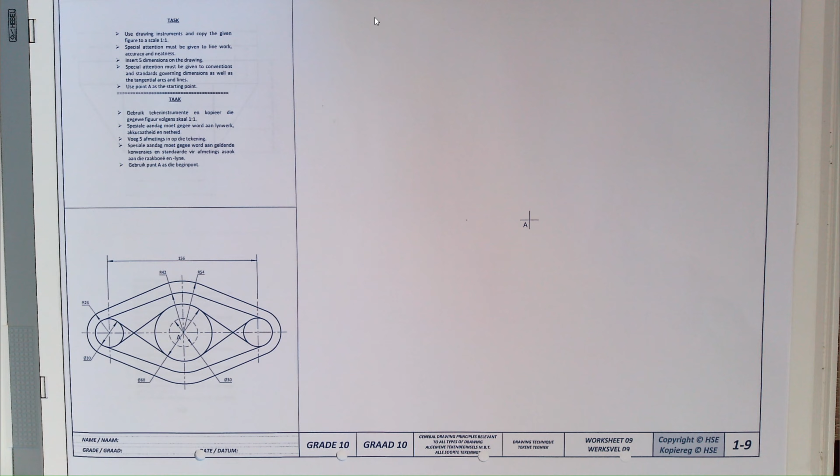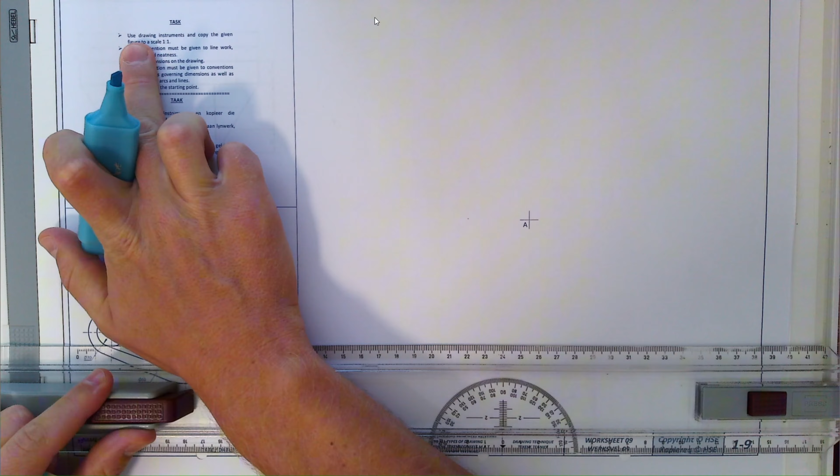In this lesson, we will look at the general drawing principles, and I will do the drawing on page 1-9 in the HSE drawing workbook. So let's get started. First, we're going to start by reading the question, and I'm going to take a highlighter and highlight everything that I find is important. The question is as follows. Use drawing instruments and copy the given figure, this is the given figure, to a scale of 1 to 1.

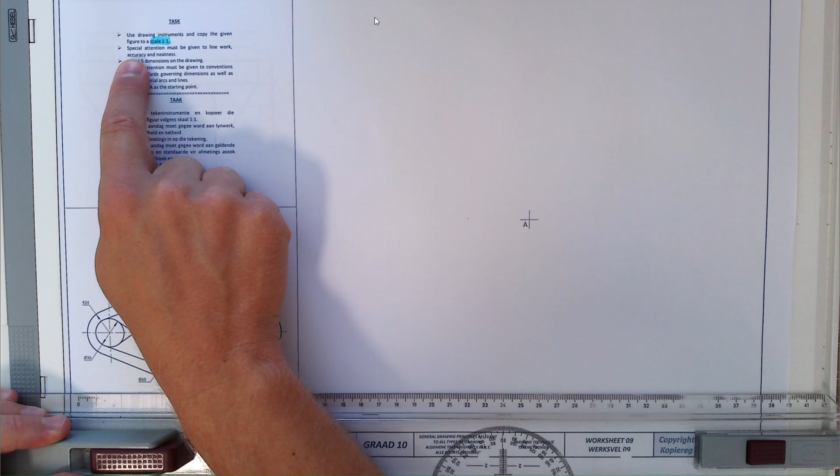What does scale 1 to 1 mean? It means we are going to take the dimensions as given here and apply it to the drawing space. There's no calculations that we need to do on conversion with our calculator. So I'm going to use the dimensions as it is given here and apply it onto the drawing space. Special attention must be given to line work, accuracy and neatness. Insert 5 dimensions on the drawing as well, and then special attention must be given to conventions, dimensions as well as tangential arcs and lines.

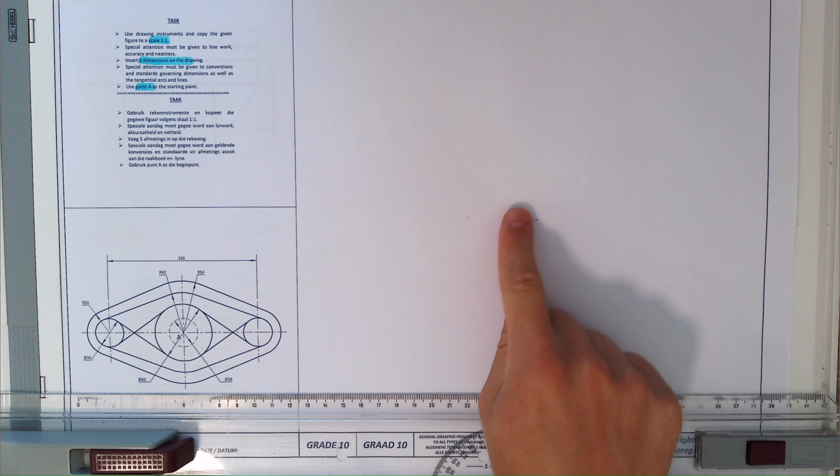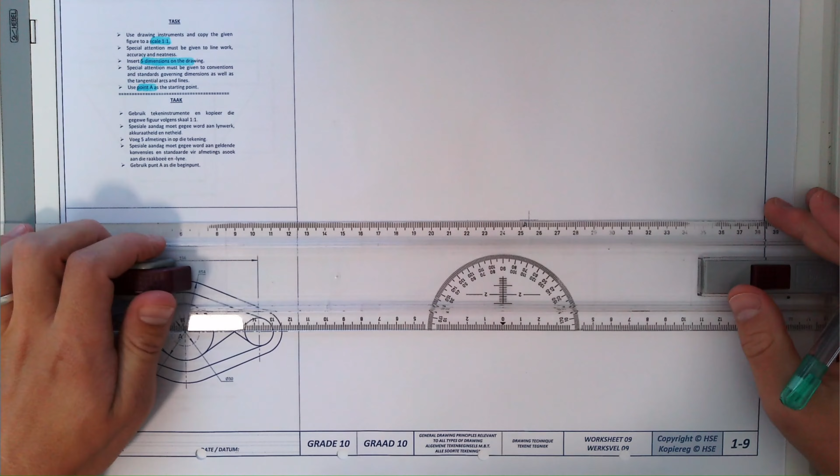Use point A as the starting point. If you look here, you can see that you have a starting point A given, and you can locate it in the middle of the circle. So first things first, I'm going to start by constructing all the center lines. Through point A, there's a vertical and a horizontal center line. So I'm going to add that in quickly. A center line is long, short, long, short, long, short.

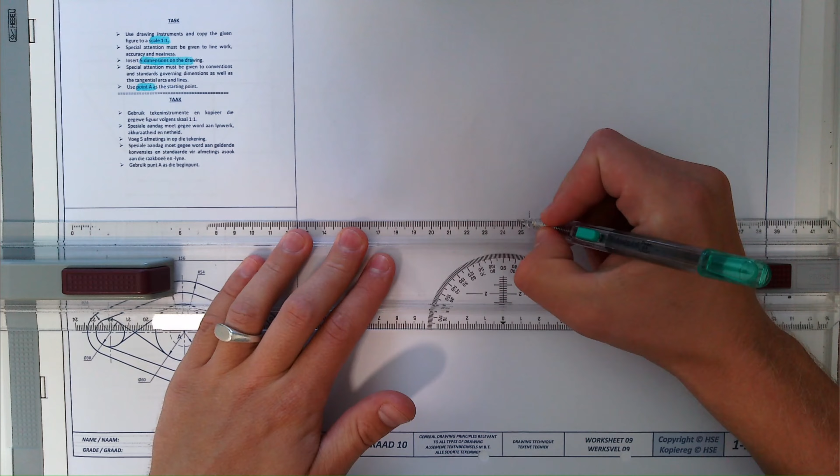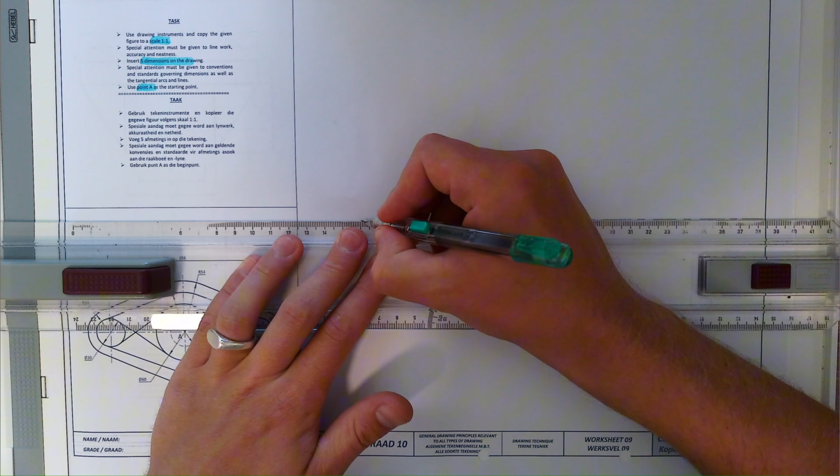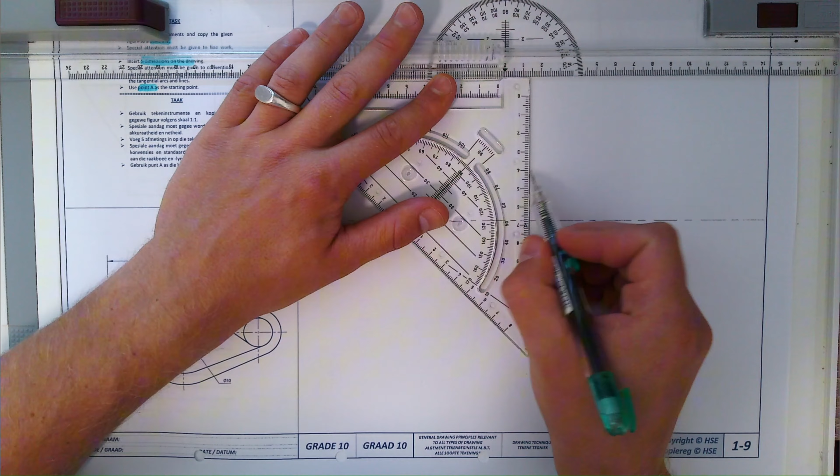I will take it to the edge of the page as well as to the left side. Short, long, short. It's like chain line. This is also a B-type line, so it's not too light and it's not too dark. Happy with that? Then I'm going to add the vertical one. I make sure that the triangle is flush against the T-square. So it's short, long, short, long. Okay, this shouldn't take you too long. Don't overthink this, just put in your center lines.

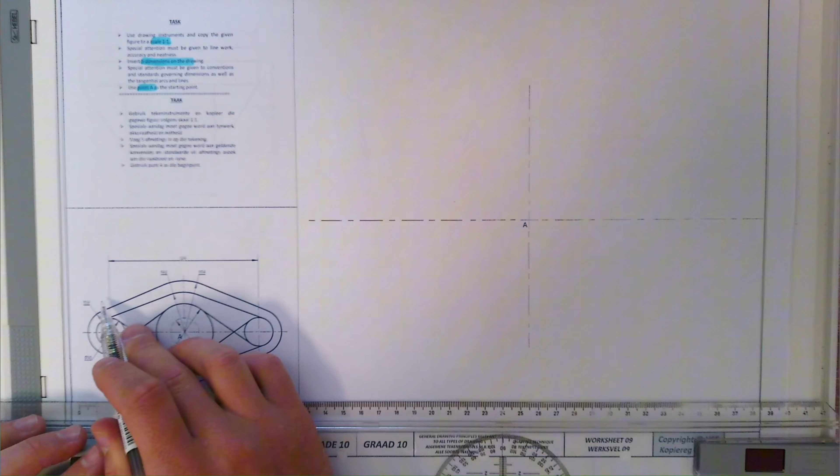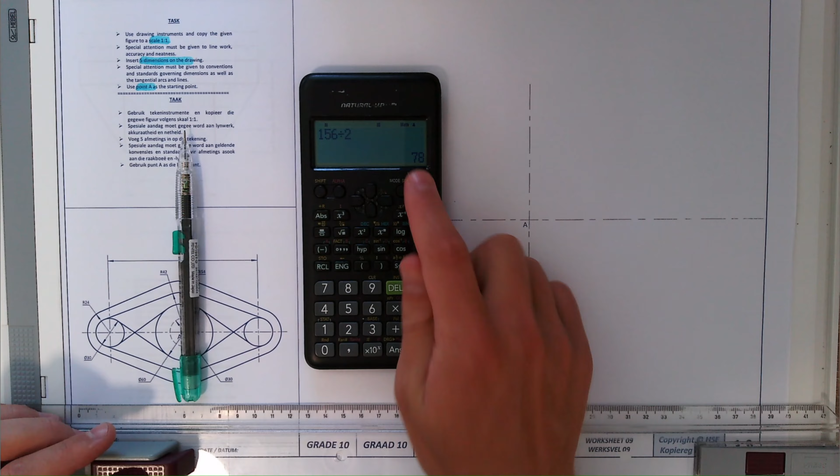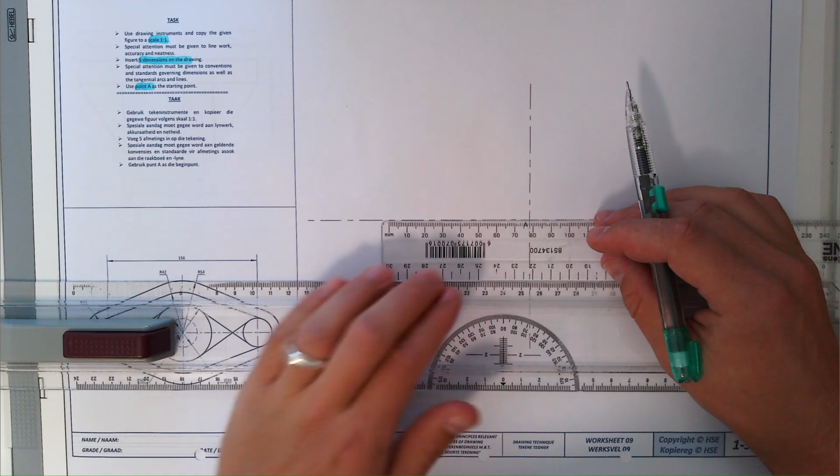Now, there are 2 additional center lines, one over here and one over here, and they are 156 millimeters apart. We have the middle point, so if we divide 156 by 2, we get 78. So from point A to that center line is 78 millimeters, and from point A to that center line is 78 millimeters. So I'm going to use a ruler. I put my ruler flush against my T-square, and I'm going to mark off 78. Just going to make a mark, and 78 to this side.

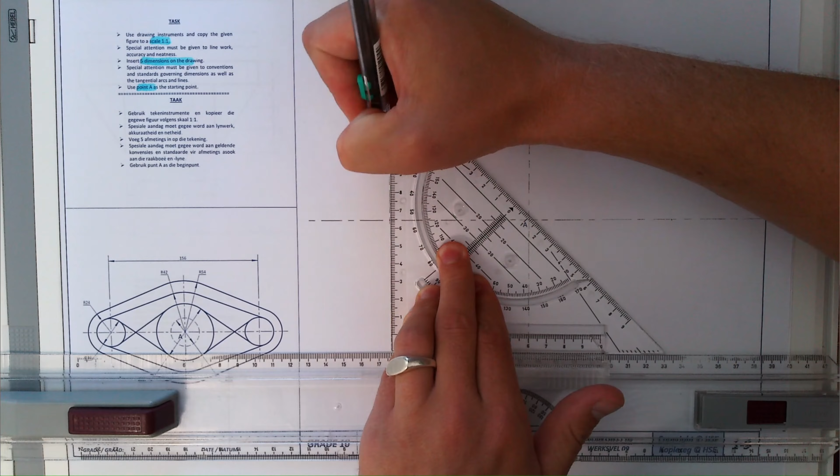There I will draw the vertical center lines. So short, long, short, long. That would be enough. And I'm going to do the same on this side. Short, long, short, long.

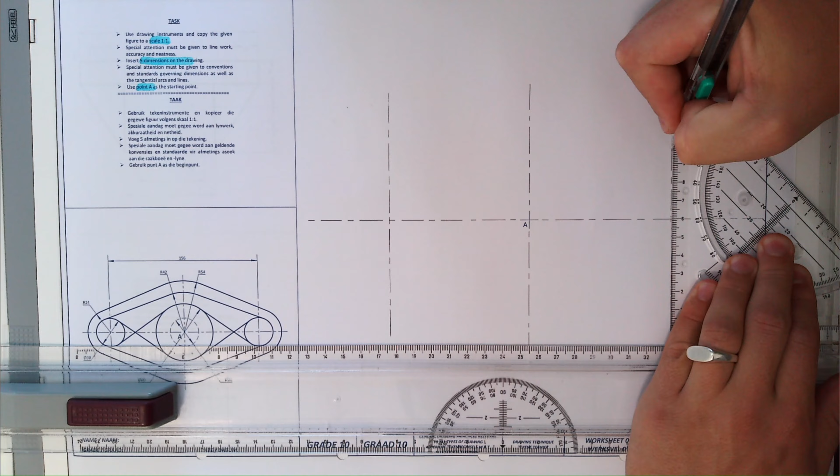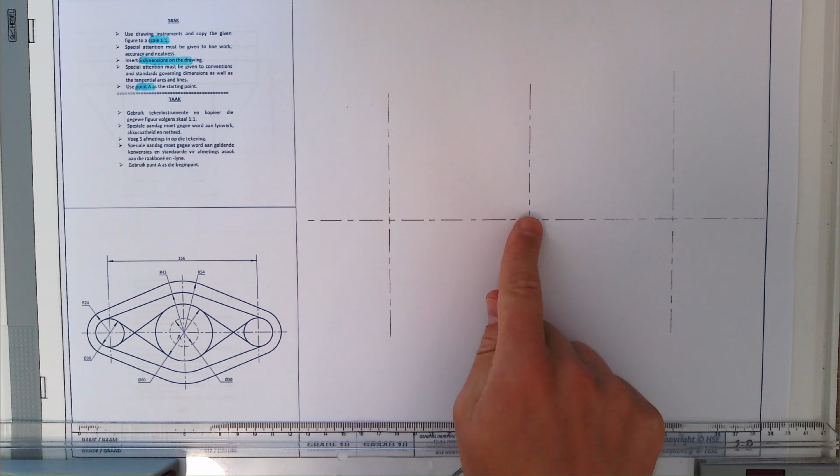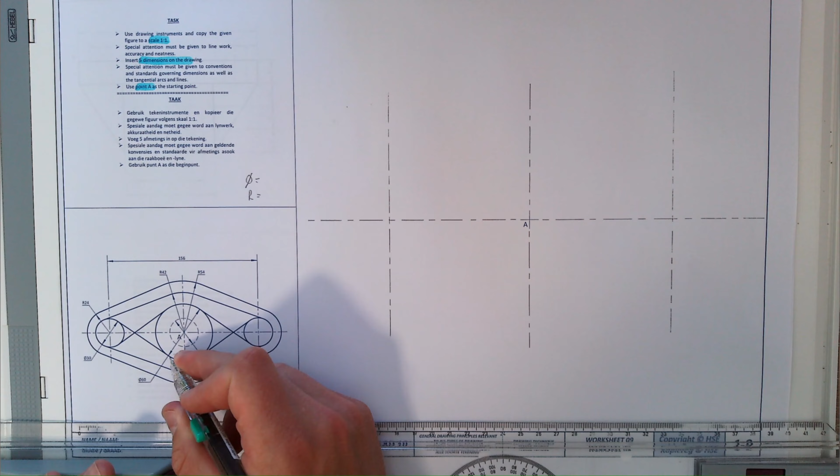Now, we are going to use our compass quite a lot today. I'm going to start in the middle at point A. I'm going to draw that big circle, which has a diameter of 60. Now remember, if they give you a symbol that looks like this, that means diameter, and if they give you an R, that means a radius. When they give you a diameter, it is from edge to edge, 60. So we need to get the radius. Half of 60 is going to be 30. So I'm going to take my compass and set this on 30 millimeters.

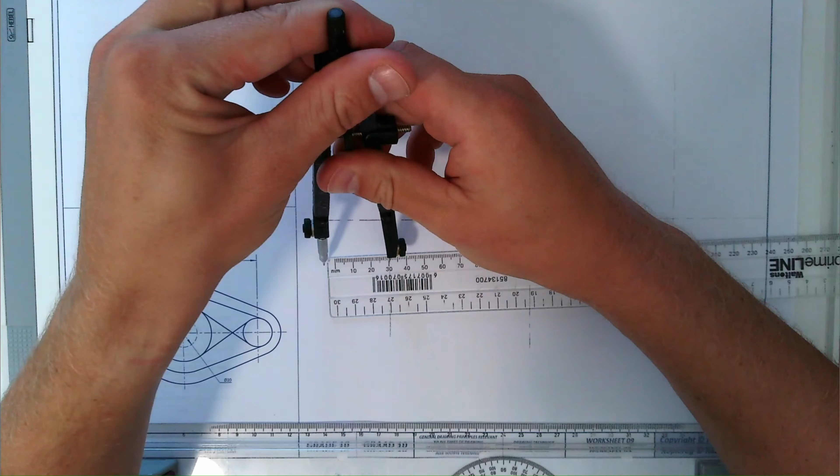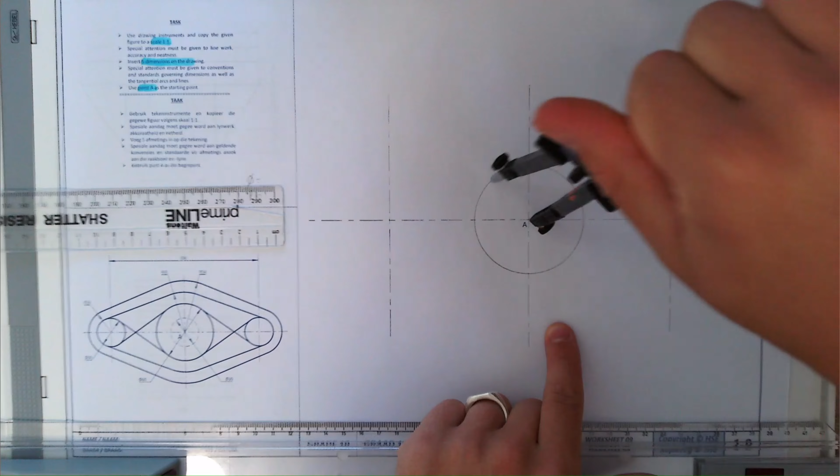Make sure to work accurately. So make sure you have your 30. I've got my 30 there. Put the sharp point in the middle at point A. Press down into the page on the drawing board. And this circle you can draw as a hard circle with a solid line. Great stuff.

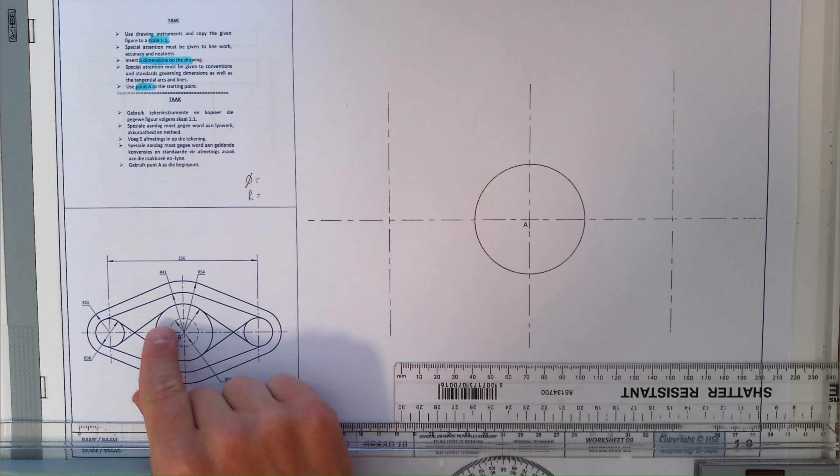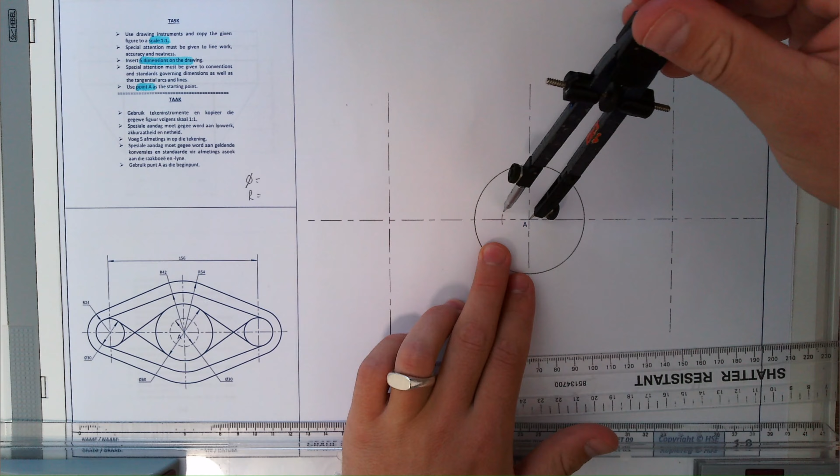Yes, that was 30. Then, on the inside, you will see that there is a dotted circle, and that measurement is diameter 30. So diameter 30 is going to be radius 15. So I'll put my compass on 15. That's a dotted line, so we're going to draw a dotted line. So it's short, short, short, all the way around. The dotted circle.

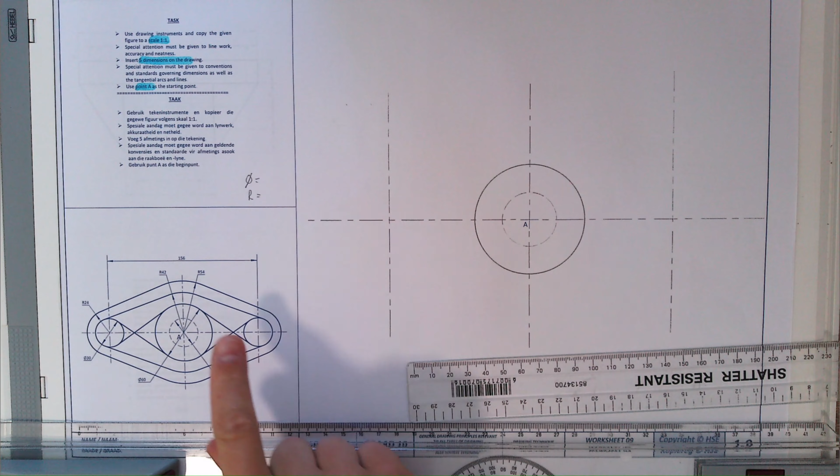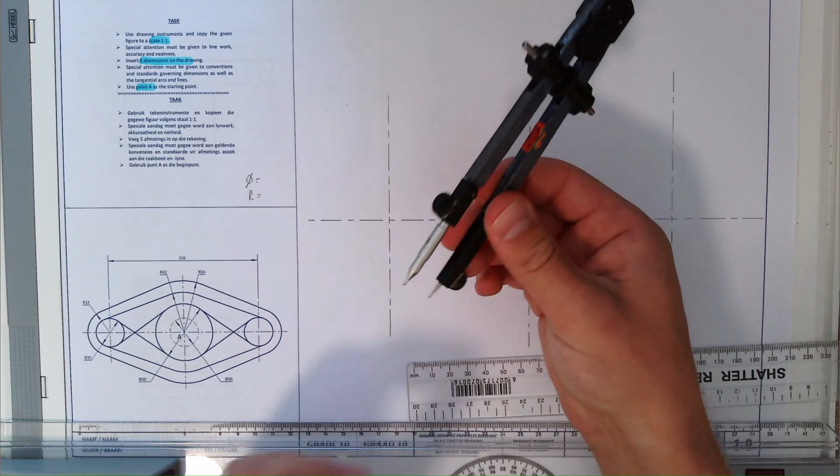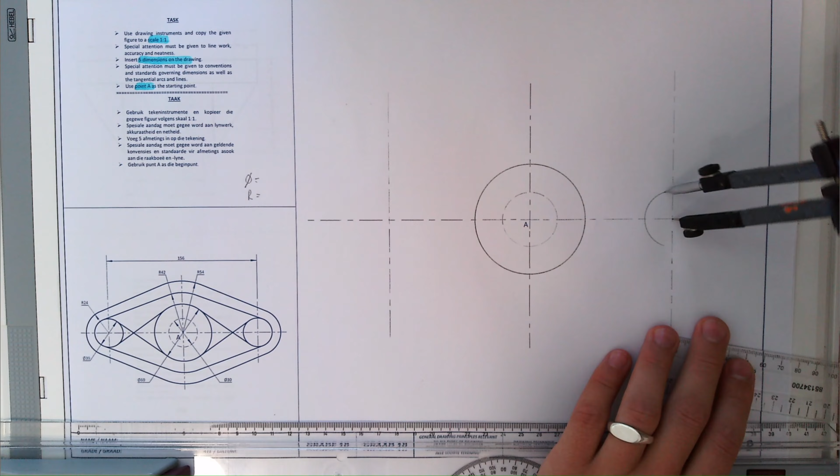Then I'm going to construct that little circle over there and that little circle over there. Both of them have a diameter of 30. So it's the same measurement that I've just used to construct this dotted circle. So we're going to keep this on 15. Just double checking before I draw. I've got my 15 radius. Why radius? Because it's given as a diameter 30. And then I can draw that circle as a solid circle. Nice and dark. As well as on this side.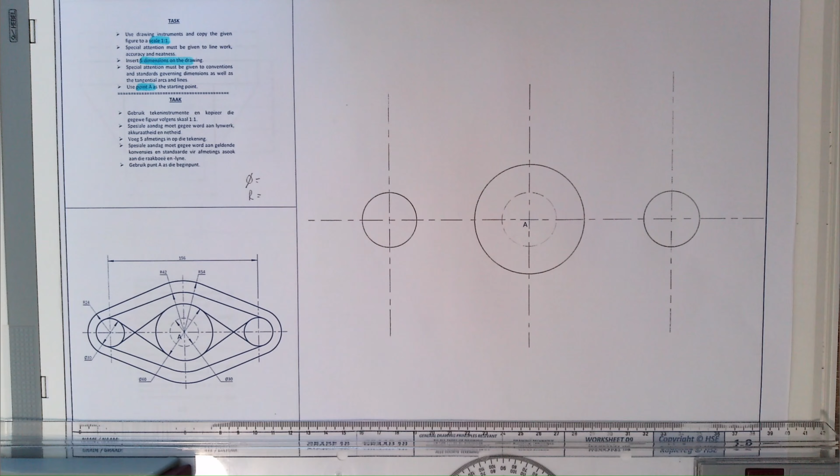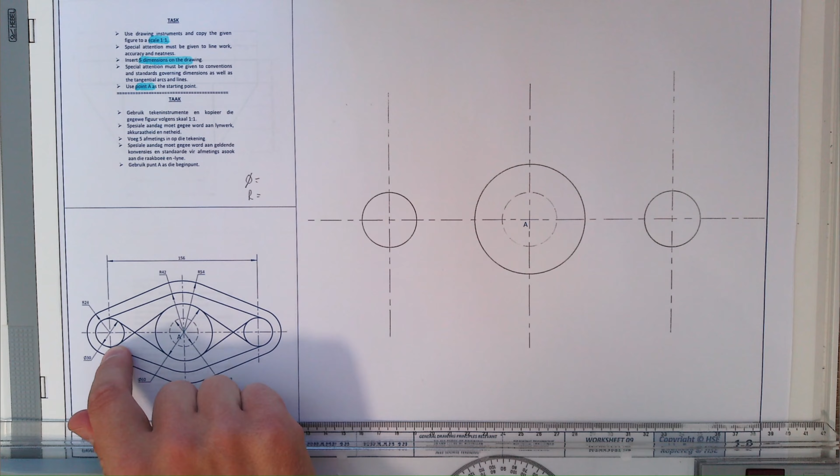Now, we need to be careful with the following lines. If you look carefully, you will see these lines are tangent lines. So from this arc of the circle to that arc of the circle, we need to draw a line which connects the two arcs. Now, a tangent line, you could think of this like a bullet being fired from there, and it needs to skim or just touch the arc of the circle. So you're going to do this with a ruler, and play until you get to a specific point where you make contact with both arcs. So I'm happy with that.

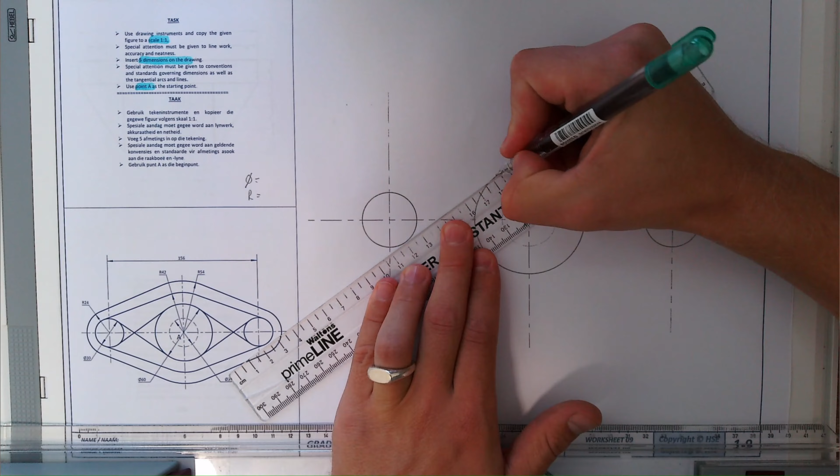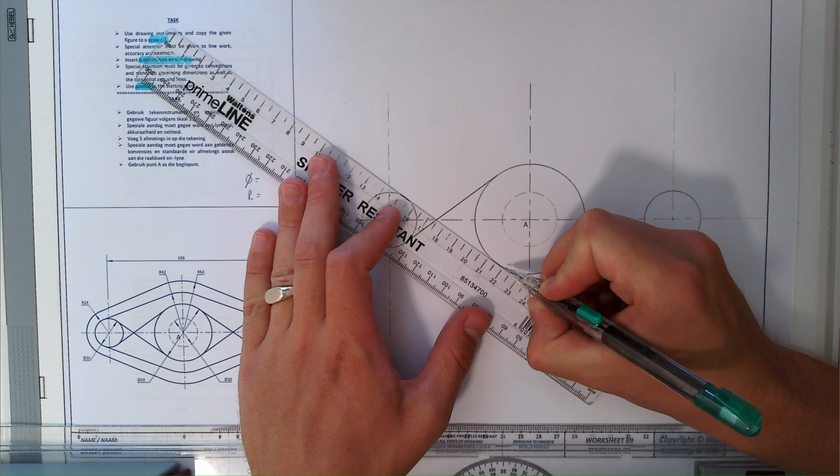The line should not go through the circle like over here. It just has to touch the arc of the circle. It's very important that you pay special attention to those tangent lines. Okay, good stuff. There's one running on this end as well, so I'm going to put that in. Double check before you draw if you are happy. I'm happy with that. And connect.

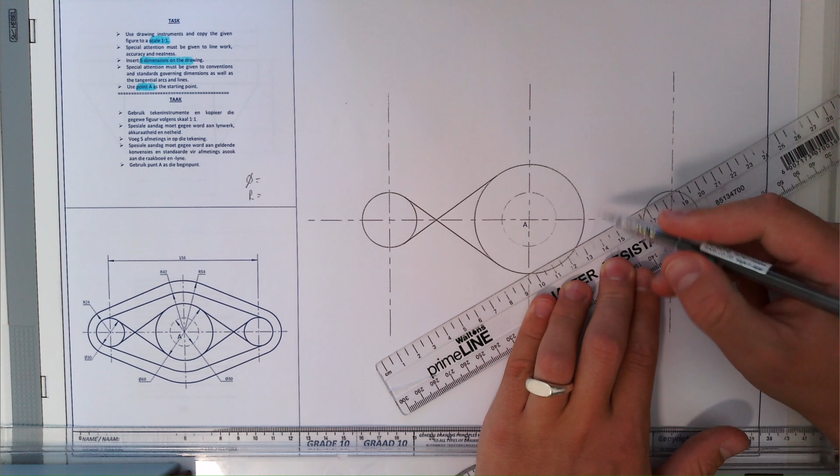So if I continued this line, it would go through the circle, and the same over there. So it's not from center to center, like that. You can see that that line will go through the circle. It's a tangent line. There we go. And one here as well.

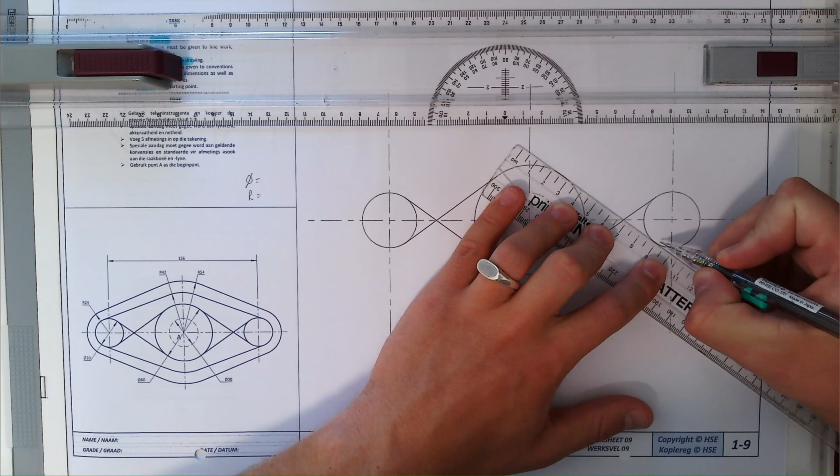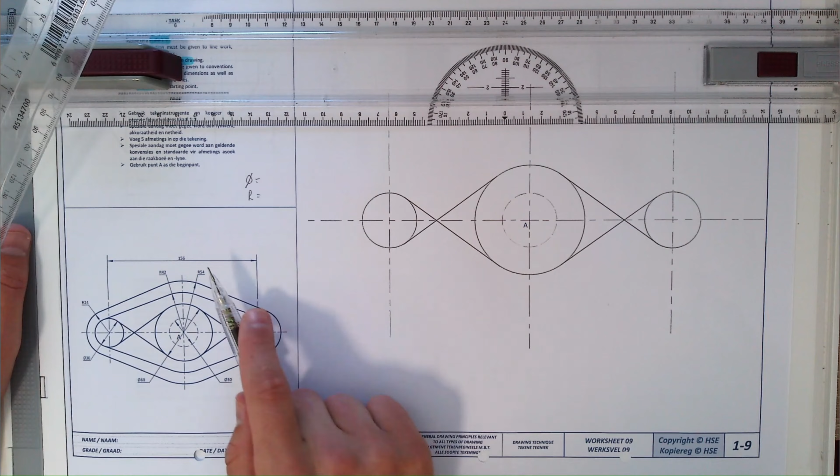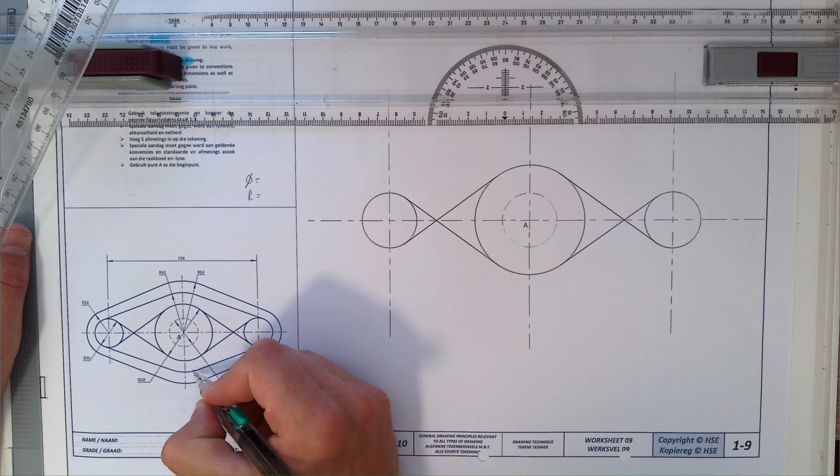There we go. Next up, we have an arc here, an arc there, an arc there, and an arc here, and an arc here. If we want to get this arc, it is radius 54. And that arc is radius 42. From the center point, you can see that the dimension is given from A to there. And that will also be 54. And that will also be 42. So 54 and 42. We are going to construct these circles light first.

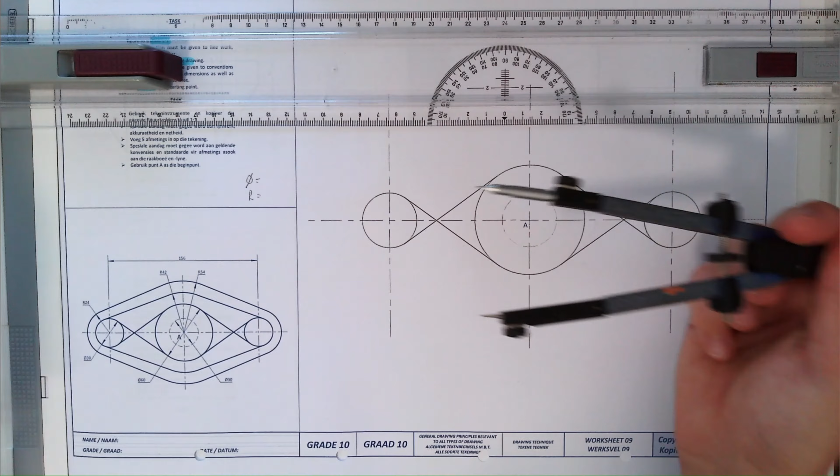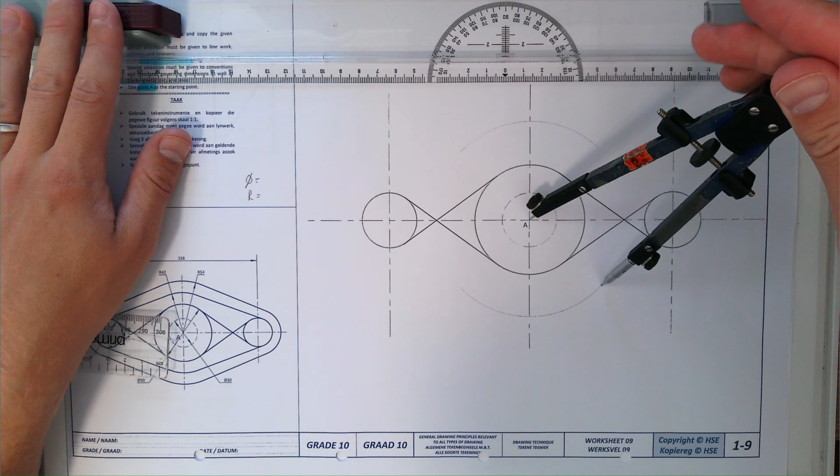So I'm going to set my compass on 54. That's 54 millimeters. Take the sharp point, put it in the middle at A, and go draw a light circle or arc at the top as well as the bottom. Okay, we're going to do this light first because it's only a little part of that arc that is going to be solid. The next one in here is a radius 42 and a radius 42.

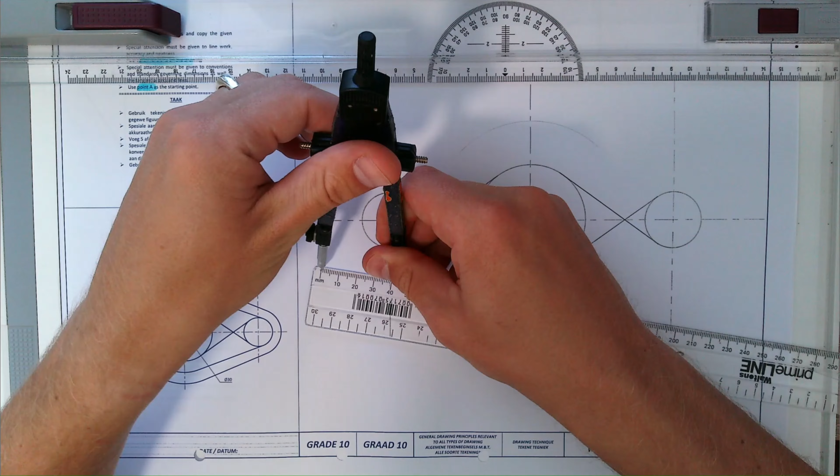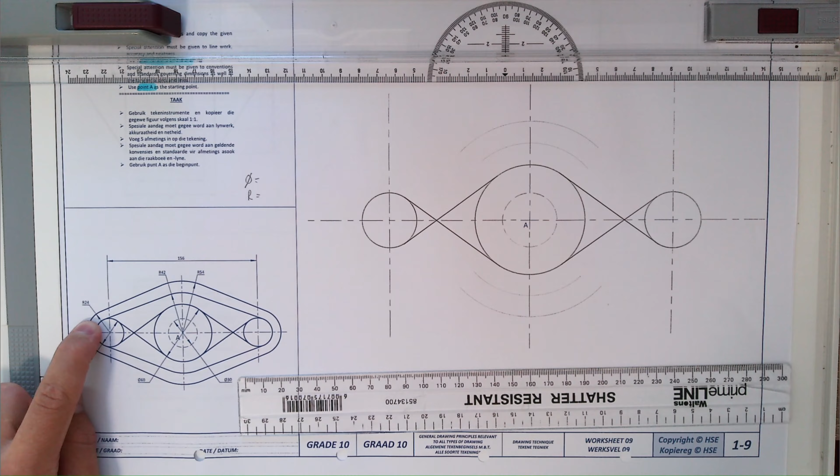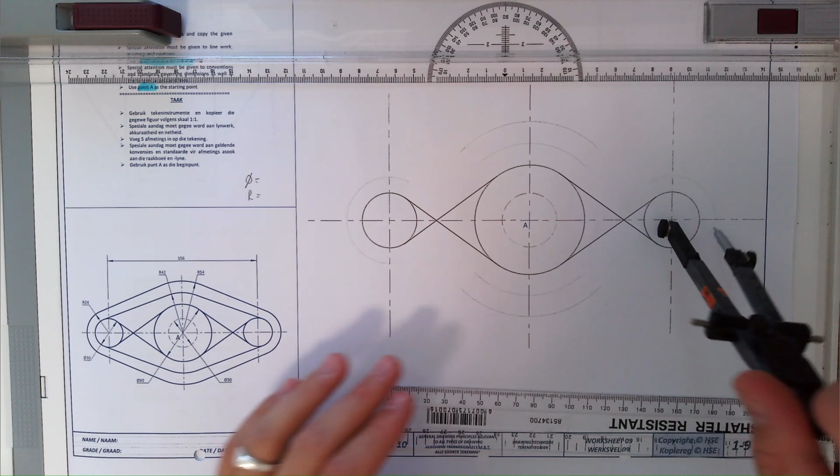So I'm going to set my compass on 42. Then I'm going to construct that arc again over there and over there. This arc at the ends has a radius of 24. So I'm going to set my compass on 24. Construct a light circle first. And the same on this side. Light first. Okay, that looks interesting.

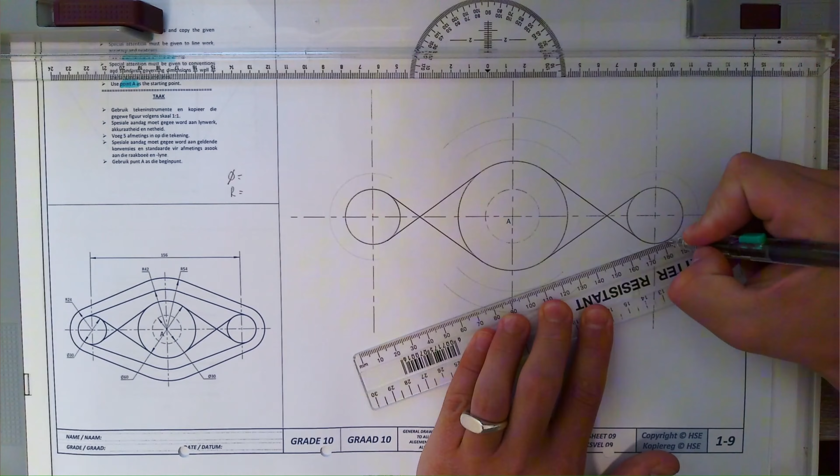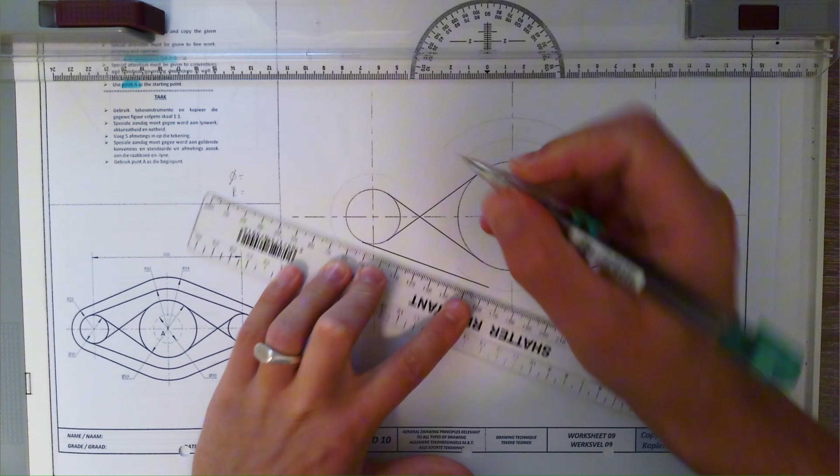Now we are going to draw tangent lines once again from this arc to this arc and from that arc to this arc. You can see here that circle is connected to this arc with a tangent line. So from there to here, I will draw a dark line. So that arc will go from there up until, can do the same on this side, tangent line, to there. So that will be your arc.

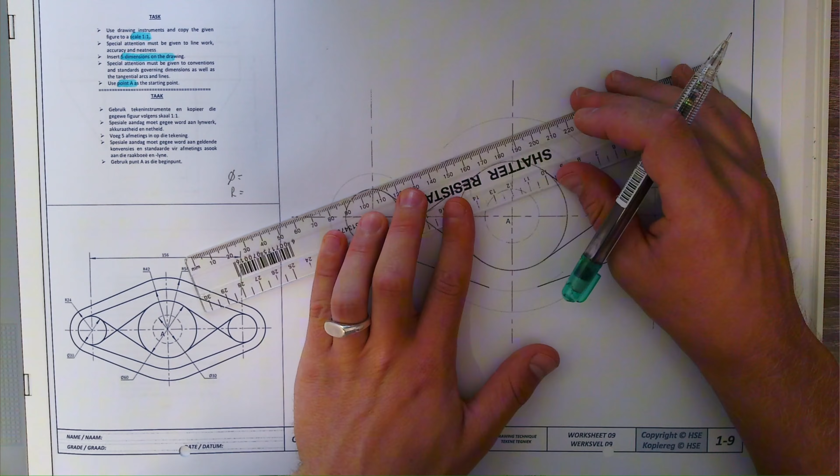I'm going to do the same here at the top. From that circle to that arc. It is very important that you do these arcs in construction first, meaning light, so that you don't mess this up. We want to keep it light first.

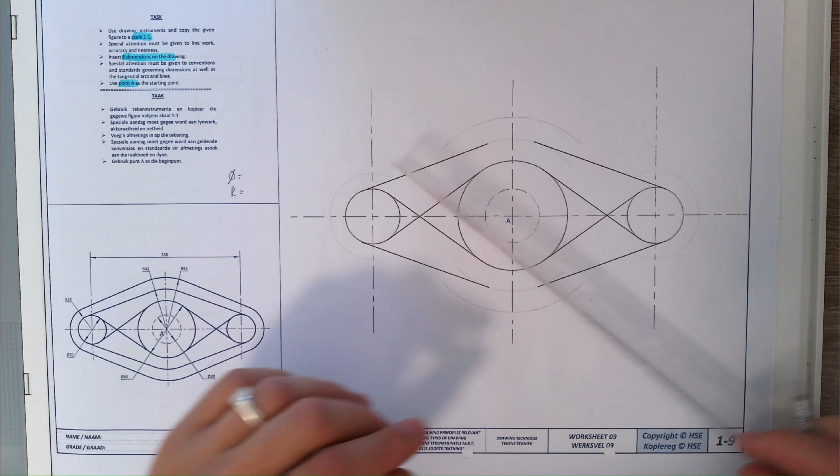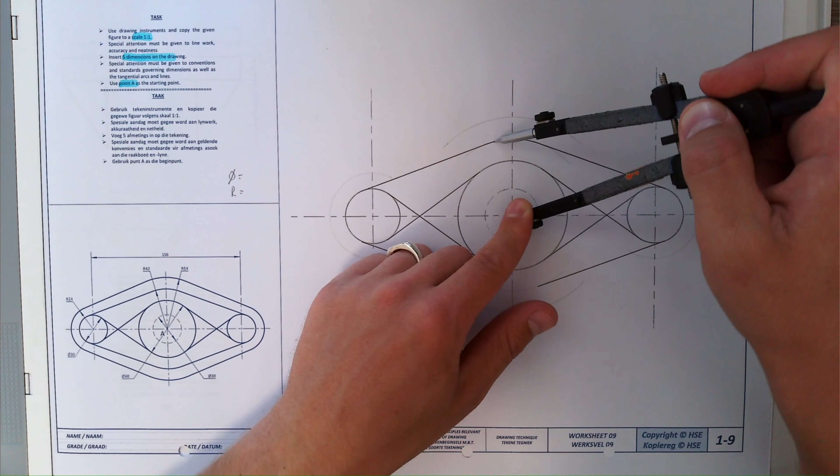Now you can take your compass. You can take the lead to that arc you've made. And all that you can do is you can just darken it between those two lines. Look how nice that looks. It is so lekker when a thing comes together. But if they don't, it's not so lekker. Okay, so from there to there.

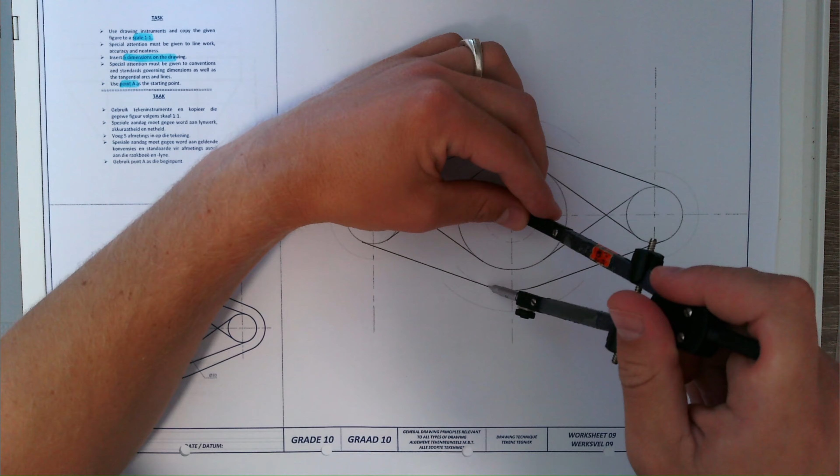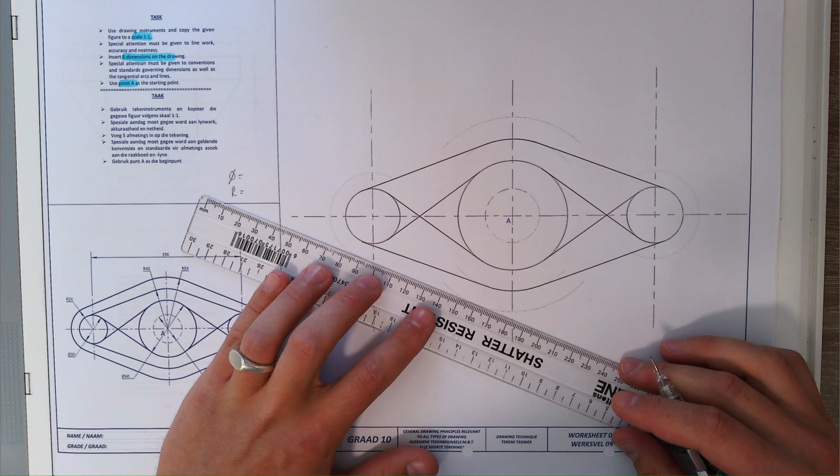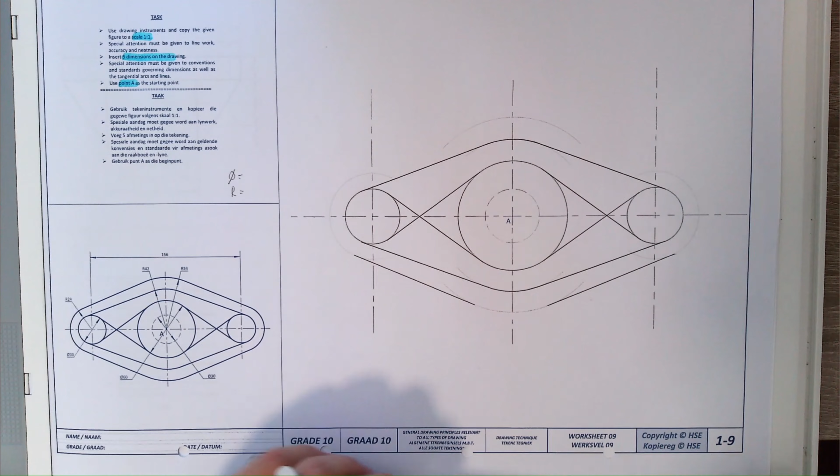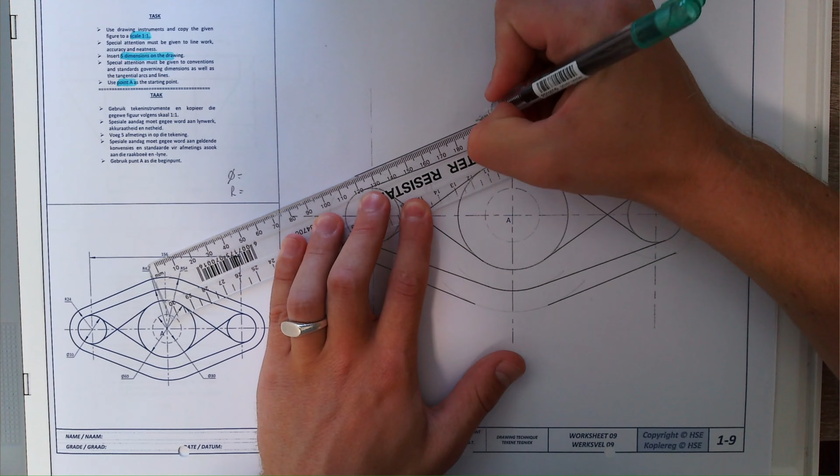Happy with that. Then our next line is from this arc to the arc at the top. So from there to there, from here to here, there to there, and there to there. So same applies to this line, a tangent line, from the one arc to that arc, from this arc to this arc. Nice and neat. You can see a clear difference between my construction line and my solid line.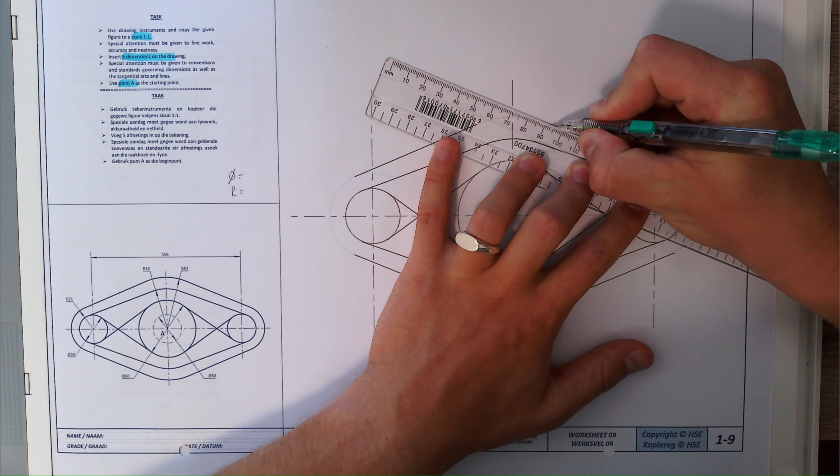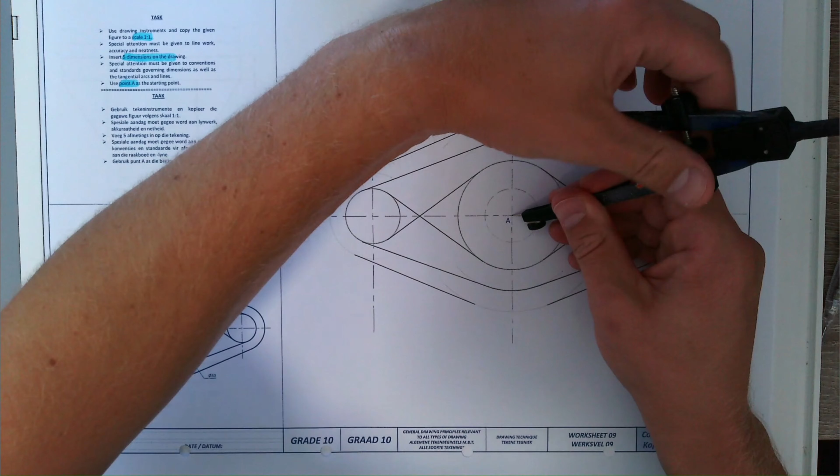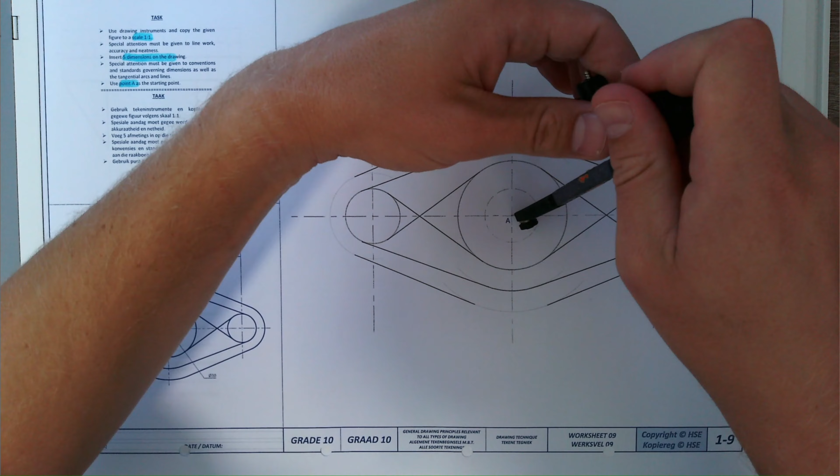Now we can darken that arc from there to there, there to there, and there to there, and there to there. You don't need to go measure off 54 again. You can just put your sharp point in the middle and take the lead to the point. Before you draw, always double check if it comes out to that point. Yes, I'm happy. And you can darken that arc. Same down here.

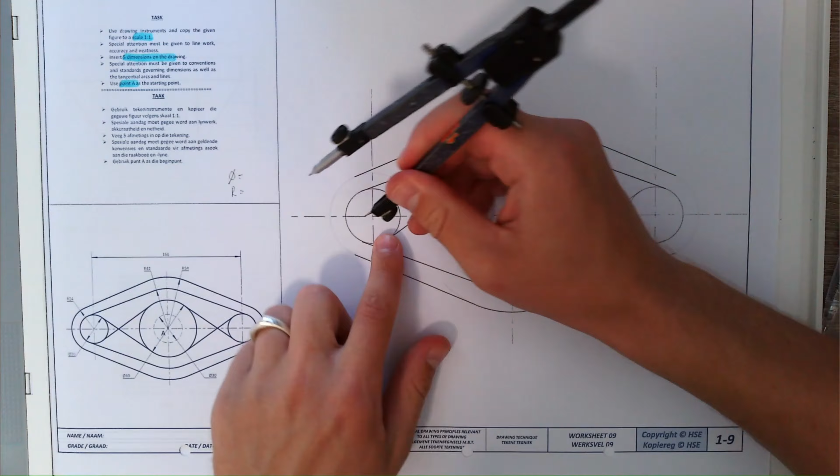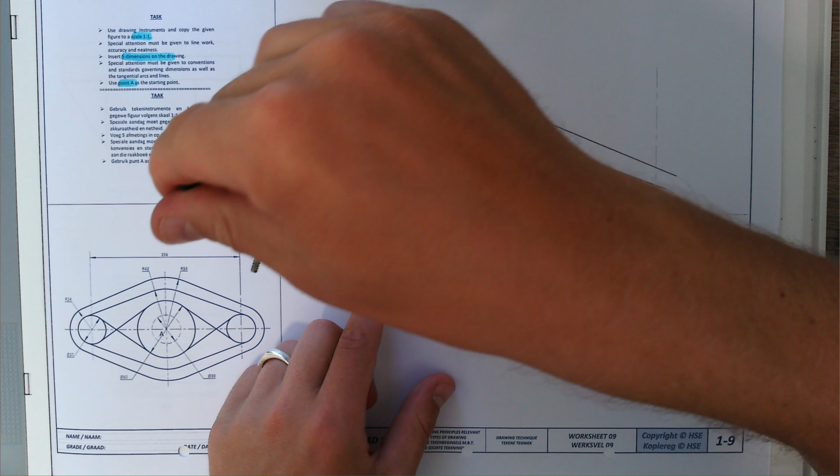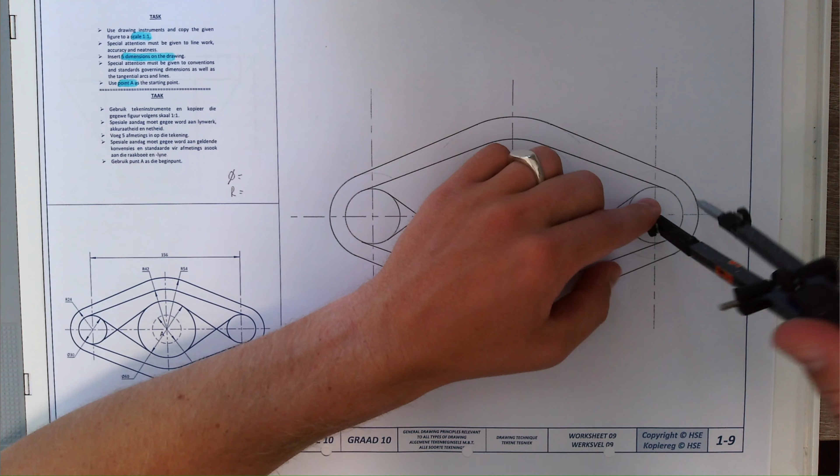Then at the edge, you just take the lead to those points. Before you draw, double check if you are happy. Yes, happy. Then you can darken. And the same on this side. Great stuff. Now just checking if we have everything. We've got the two circles, the big circle, the dotted circle, tangent, tangent, tangent, tangent. Yes. They've asked you to add 5 dimensions.

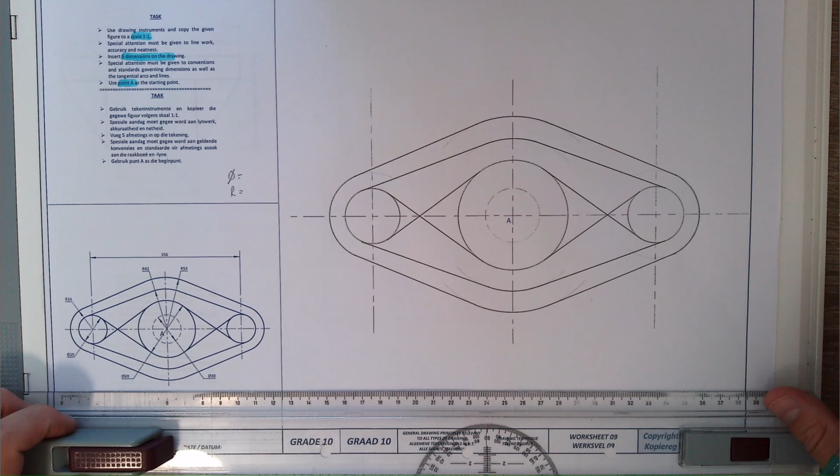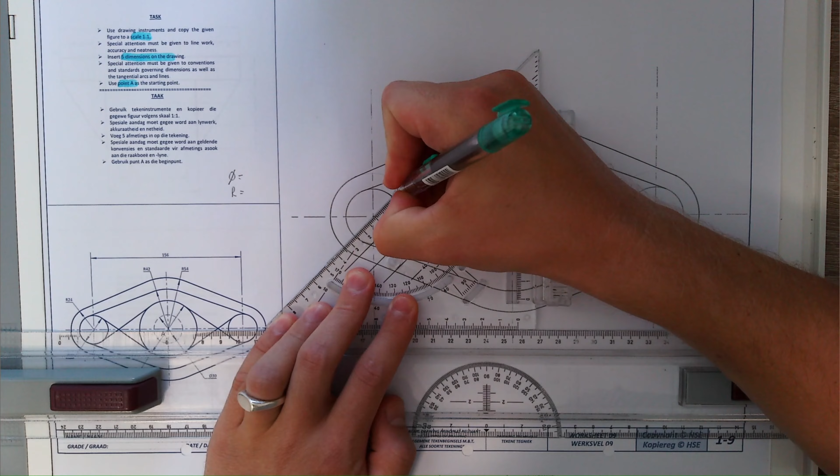So let's say we're going to give 2 diameters and 2 radiuses and 1 width. That 156 we can give. But I'll give the diameter over here. So I'll take my 45 degrees. In light construction, draw a 45-degree line. Darken the tip from that edge, from there to there. We are using tips. And then on a line, nice and neat, you write diameter 30.

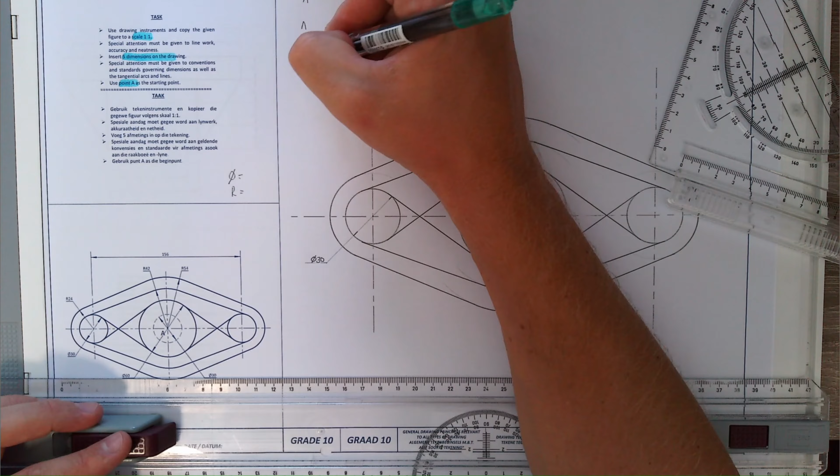So I'm using a tip instead of an arrow because arrows tend to differ. One person will make his or her arrow like that. Another person will color it in. Other person's arrow is thick and has a line through. So there are too many variables. So what we do is we just darken the line at the edge to show from there to there. That indicates like an arrow. It is diameter 30. Let's give that radius 24 on this side.

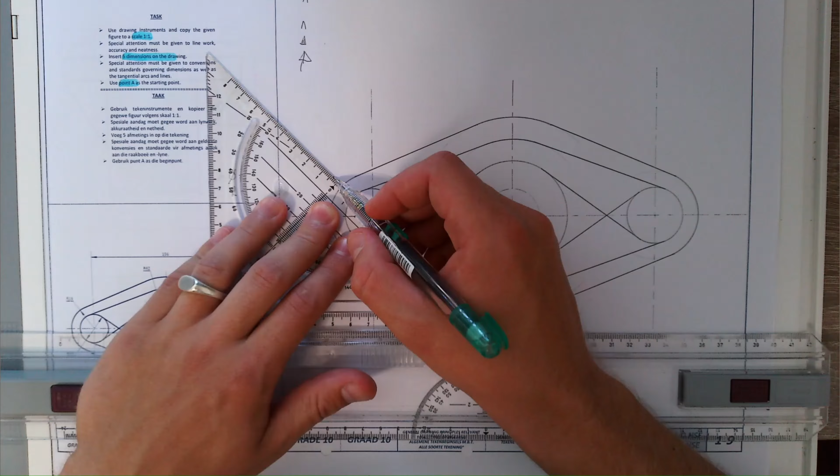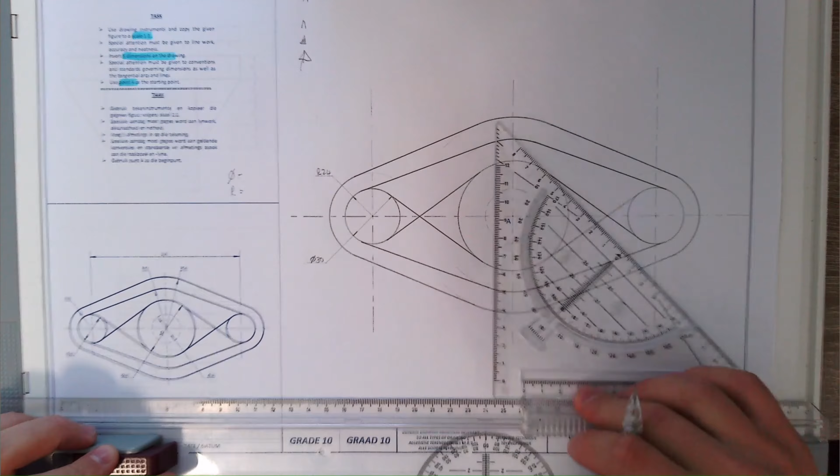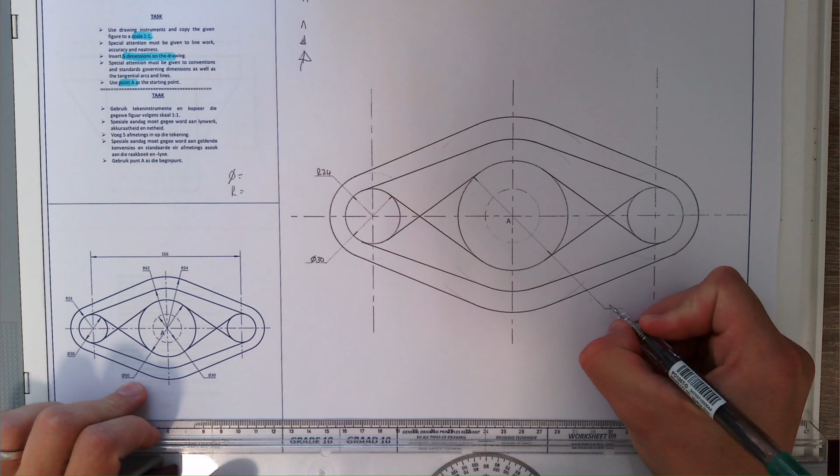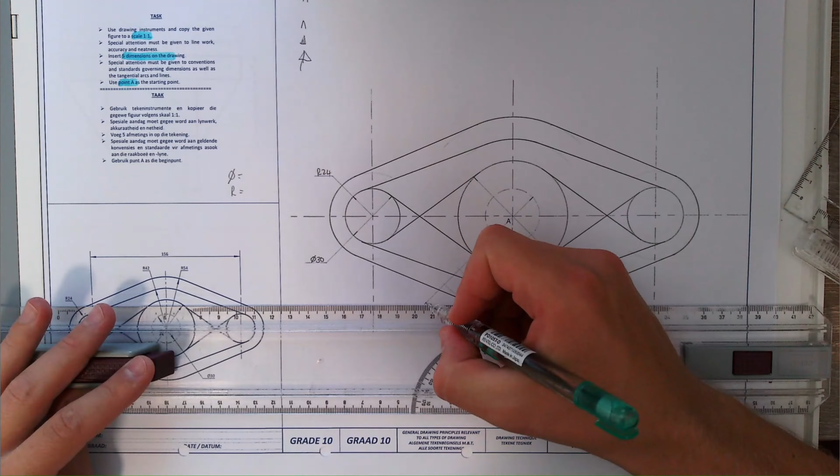Like 45. Nice in construction, light. On a line, just darken the tip. So you say from there to there, that is radius 24. Now let's give the big circle in here, light all the way through. From there to there on a line, that was diameter 60, and this one, a small circle in the inside, from there to there. That was diameter 30.

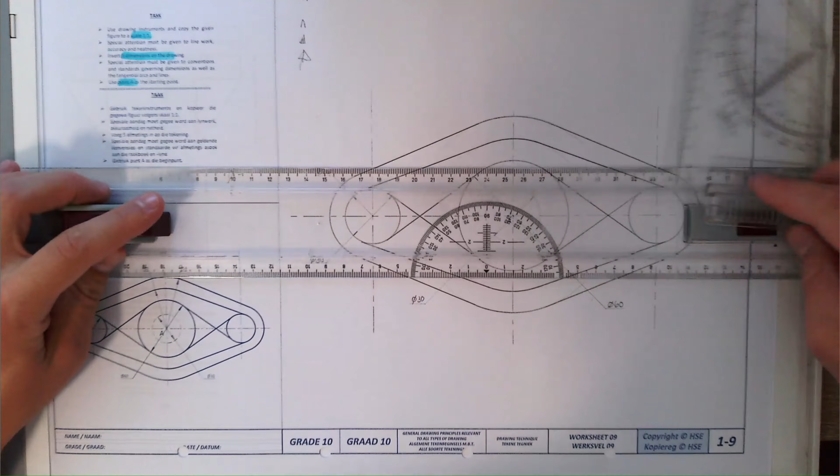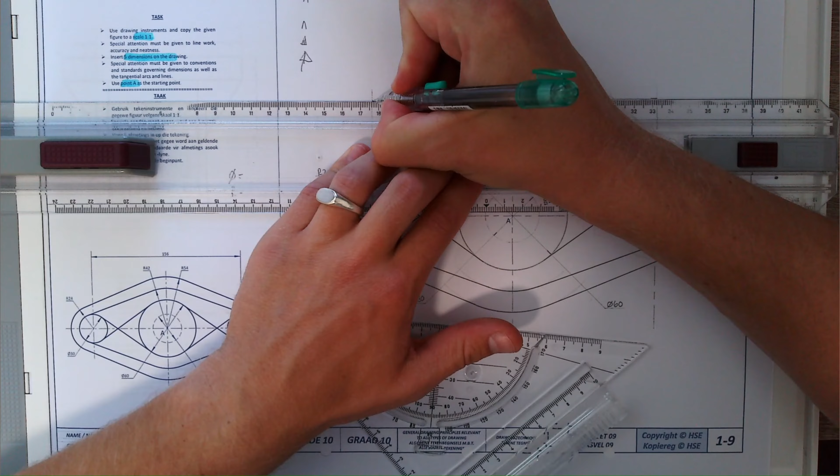Now, from the one center line to that center line, I'm going to add in that dimension line. So I'm just going to erase a bit. Extend this line up. And within those two lines, I'm going to draw a light line across. There to there. Gonna darken the tip. And on the line, I will write 156. And that is that.